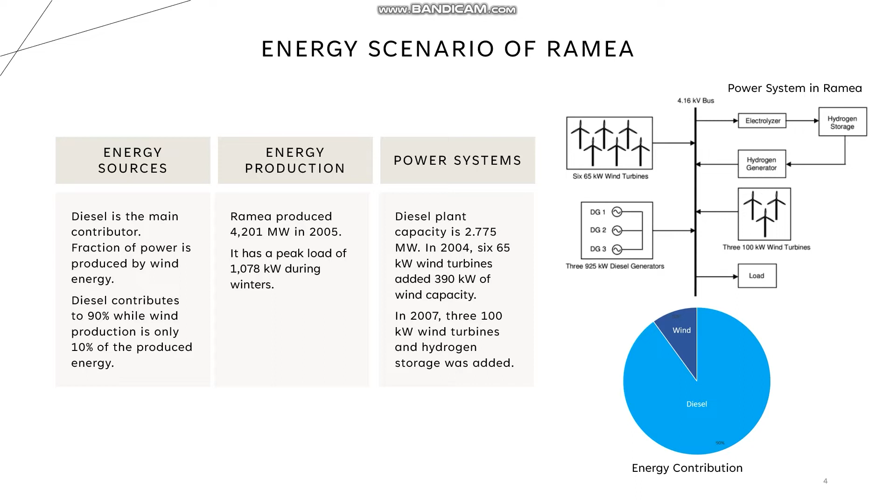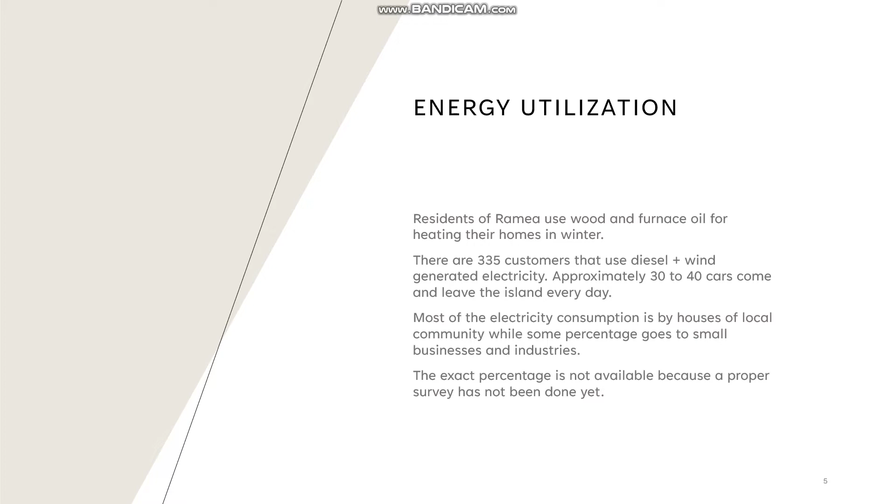Most of the electricity consumption is by houses, while some percentage goes to small businesses and industries. The exact percentage could not be found because a proper survey has not been done yet.

Looking at the greenhouse gas emissions and environmental impacts in Ramea, before the wind farm installation there was 100% diesel-based energy with a fuel consumption of 1 million liters per year and an average of 3,300 tons of greenhouse gas emissions.

When the wind plus diesel hybrid power system was introduced, it displaced about 425,000 kilowatt-hours of diesel energy and saved about 120,000 liters of diesel. The GHG reduction was as follows: 320 tons per year of carbon dioxide, 6.8 tons per year of nitrogen oxide, and 0.43 tons per year of sulfur dioxide, seen as overall GHG reduction.

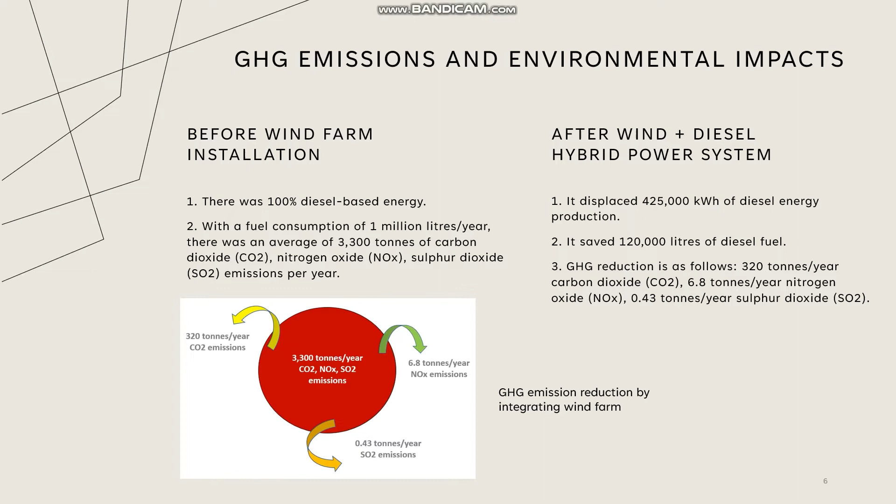It is also shown in the figure below.

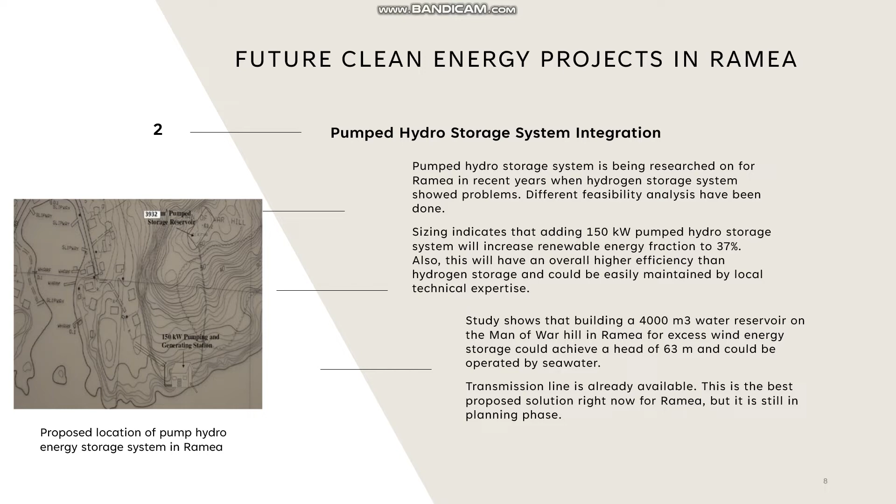The study shows that building a 4,000 meter cube water reservoir on Man of War Hill for excess wind energy storage could achieve a head of 63 meters and could be operated by seawater. And because the transmission line is already available, this is probably the best solution right now for Ramea, but it is still in planning phase.

Hi, my name is Nafis Ali and I'm gonna present the Iqaluit, an off-grid community of Nunavut.

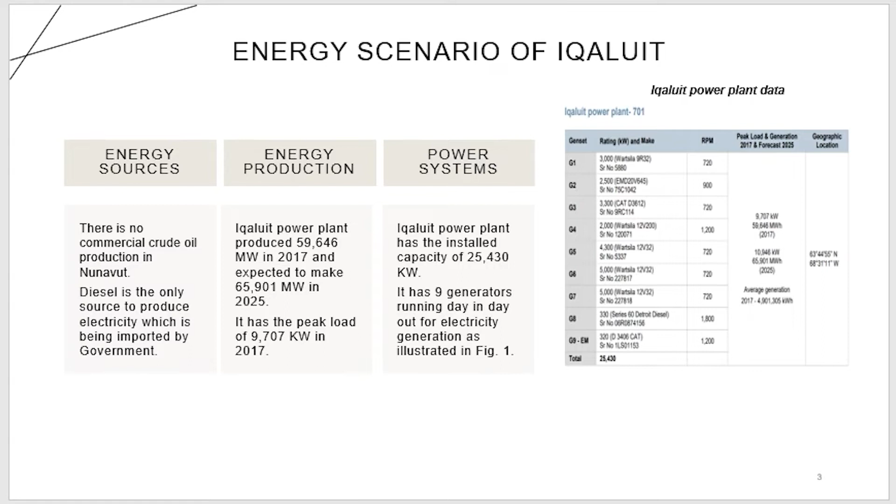First of all, I will shed light on the energy scenario of Iqaluit. There is no commercial crude oil production in Nunavut. Diesel is the only source to produce electricity, which is being imported by the government. Iqaluit power plant produced around 60,000 megawatt in 2017 with an average peak load of 9,700 kilowatts, and it has the installed capacity of 25,430 kilowatts. Nunavut has some of Canada's highest electricity rates.

Nearly 80% of all energy costs in Nunavut are covered by the government of Nunavut to keep the cost of electricity reasonable. When it comes to energy consumption, 79% of the total energy is used by stationary energy sectors, which are industries, residential and commercial buildings, and the rest is used by the transportation sector and waste.

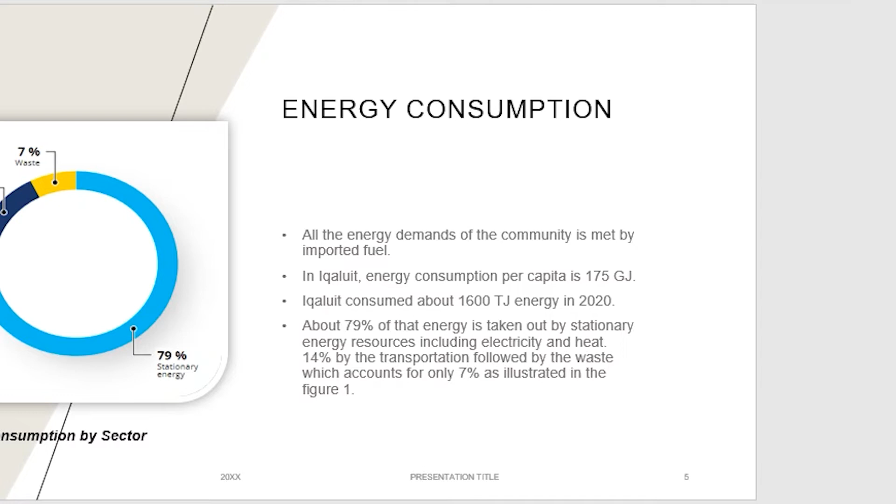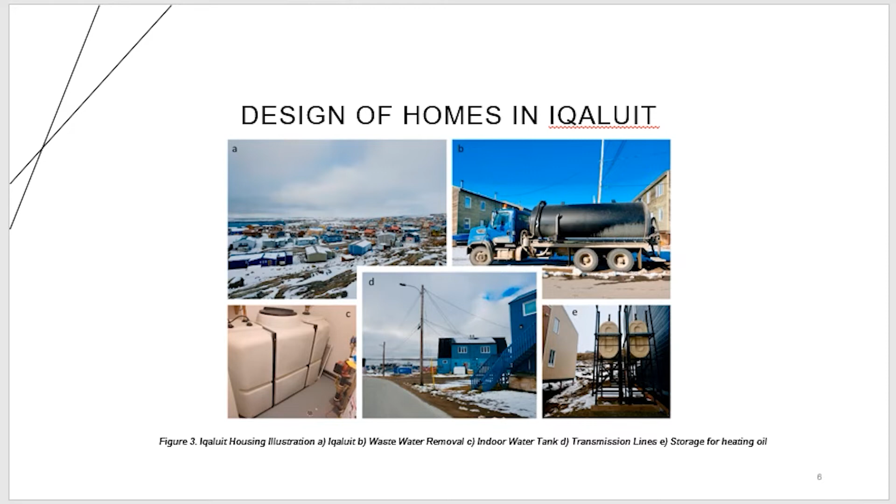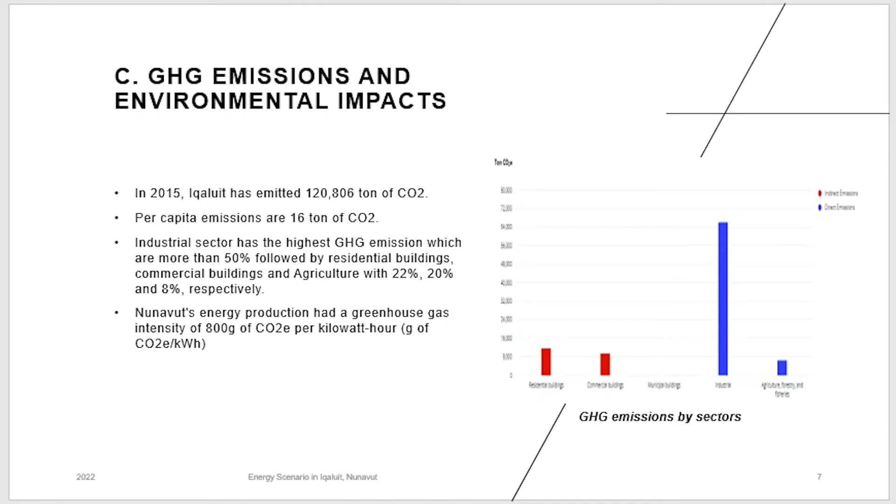When it comes to GHG emissions, the industrial sector has the highest GHG emissions, followed by residential and commercial buildings and agricultural sectors. Nunavut's energy production had a greenhouse gas intensity of 800 grams of CO2 emissions per kilowatt hour.

As you know, the whole city is electrified by diesel powered generators, which are the major source of GHG emissions. Diesel kept in storage tanks throughout the year often contaminates the water through spillage. It also emits toxic pollutants like particulate matter, volatile organic compounds, and nitrous oxide, which worsen respiratory problems and can contribute to smog.

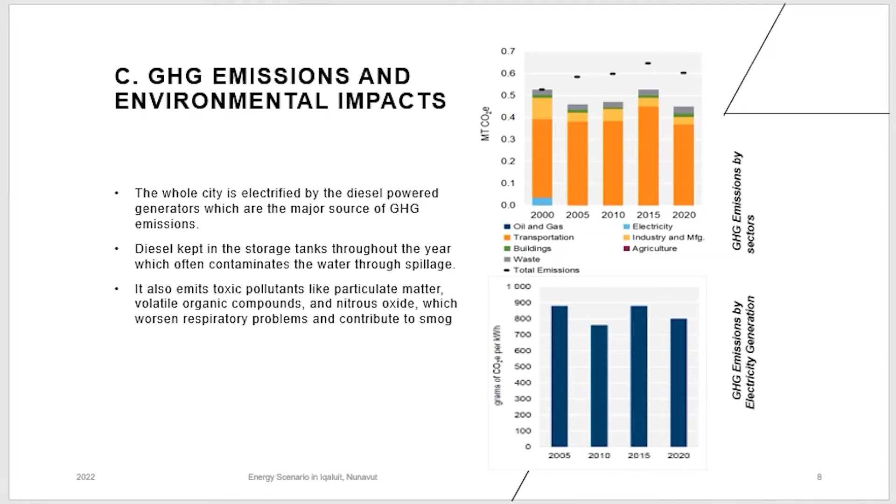These are the potential renewable energy resources available in Iqaluit, and due to insufficient funding, they have done nothing to harness these resources yet.

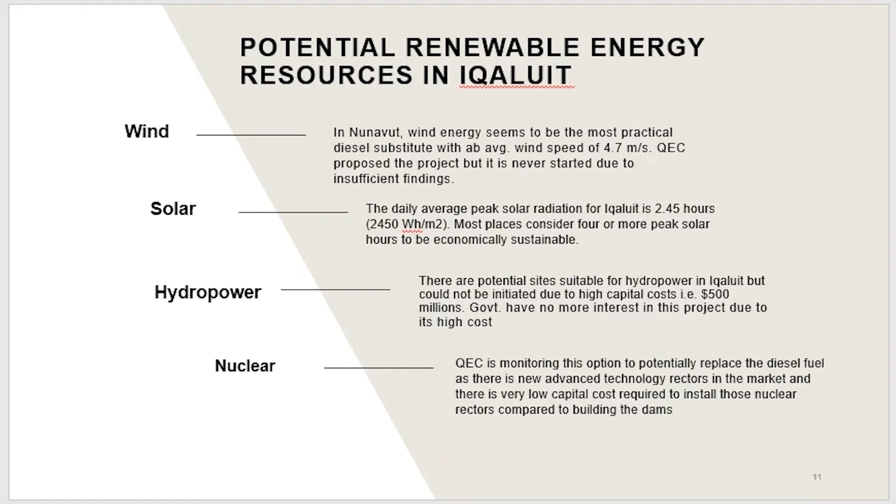The most important one is tidal energy, because this is possibly the finest renewable energy substitute for diesel in this region. Iqaluit has some of the highest tides in Canada, and it has the potential of producing 30,000 megawatt from 34 different locations.

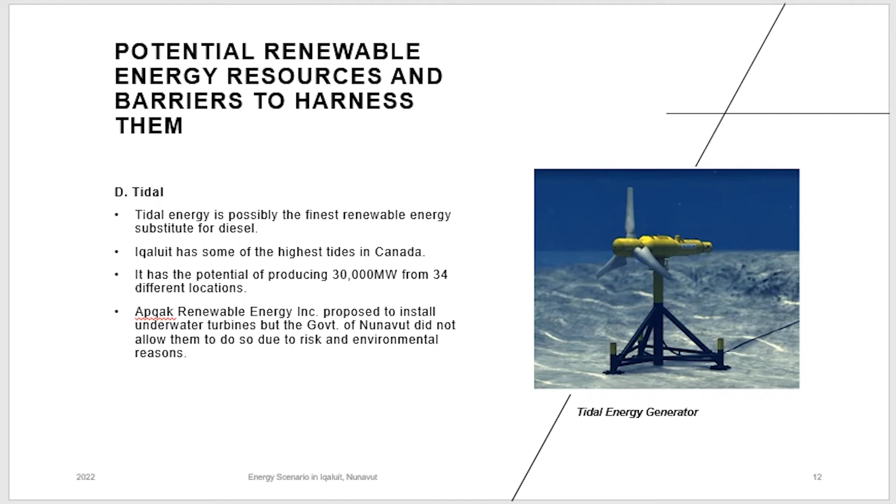Apqak Renewable Energy Company proposed to install underwater turbines, but the government of Nunavut did not allow them to do so due to risk and environmental reasons.

These are some other options which can be considered to cut down diesel consumption: energy efficiency retrofits and district heating systems. It can work by collecting the residual heat from industries and then delivering it to the households.

And solar energy generation with net metering. Customers are permitted by QEC to generate up to 10 megawatt from renewable energy resources and send any excess electricity to the local grid in exchange for credits applied to the monthly bills. There's another one, you can also capture the carbon by utilizing CCS technology.

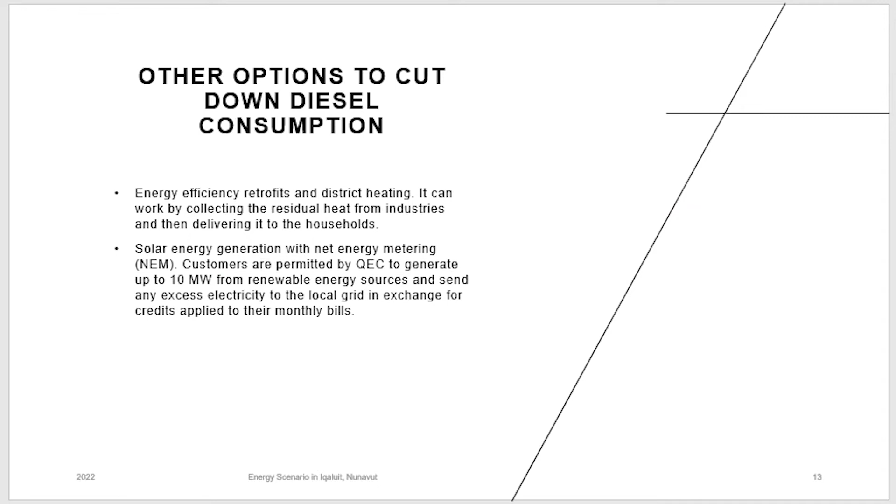Brochet is an off-grid community located in northern Manitoba and is also considered a northern community of Canada.

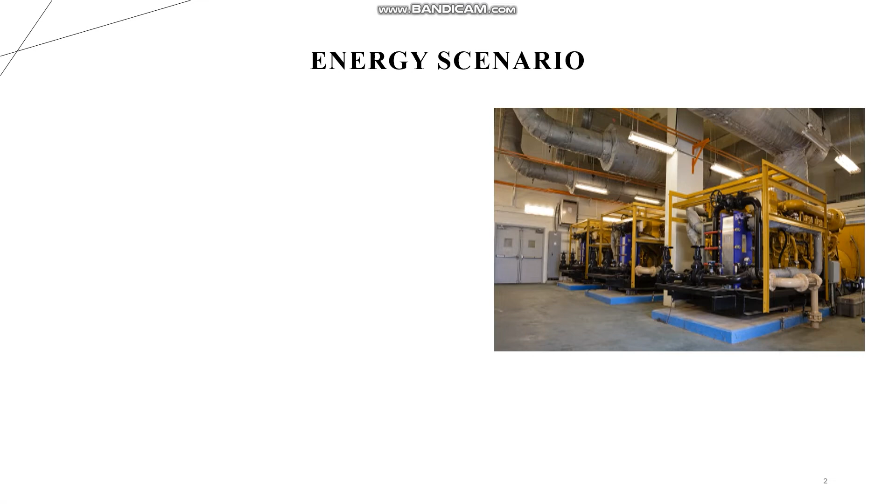First of all, I'd like to discuss the energy scenario. The Brochet power station consists of three diesel generators and has a capacity to generate 2.63 megawatts. People of Brochet also use oil furnaces for heating purposes. Some of the homes still use wood for heating and cooking.

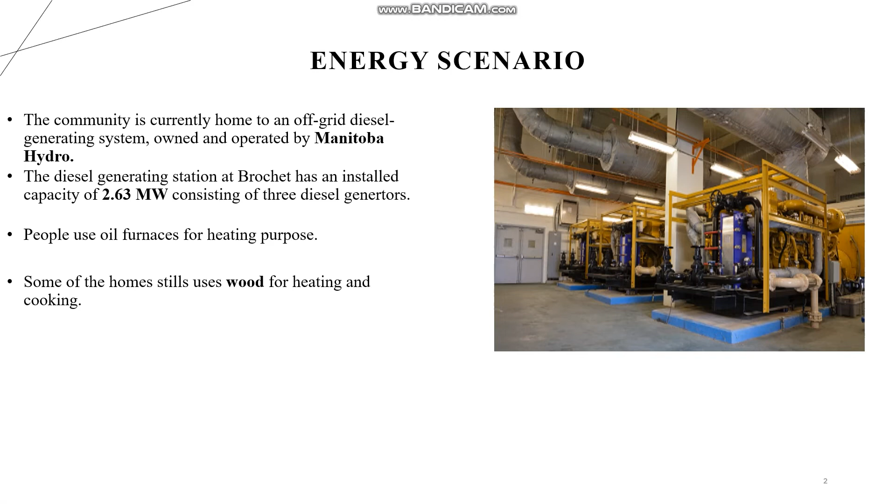Using oil to heat a home directly with a liquid fuel furnace is approximately 1.9 to 2.8 times more efficient than using diesel to generate electricity, which is then used to heat the home with resistive heaters.

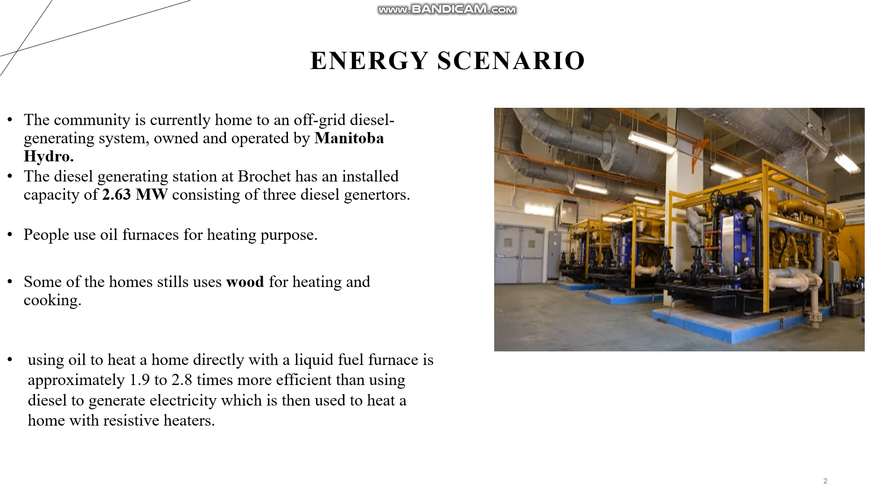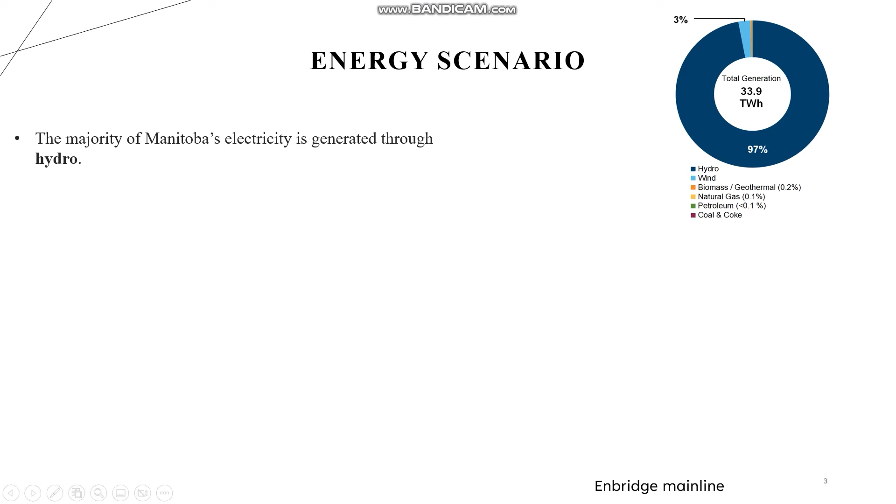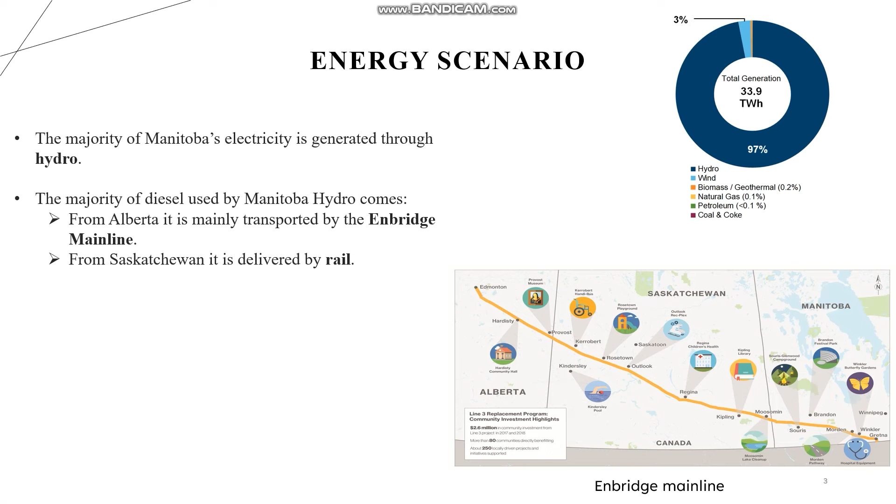As we know, Manitoba generates most of its electricity through hydro, almost 97%, as shown in the figure. So the majority of diesel used by Manitoba Hydro comes from Alberta, transported via the Enbridge Mainline, or from Saskatchewan through rail. Here's a diagram showing the Enbridge Mainline, which starts from Edmonton and passes through the main cities of Saskatchewan and Manitoba.

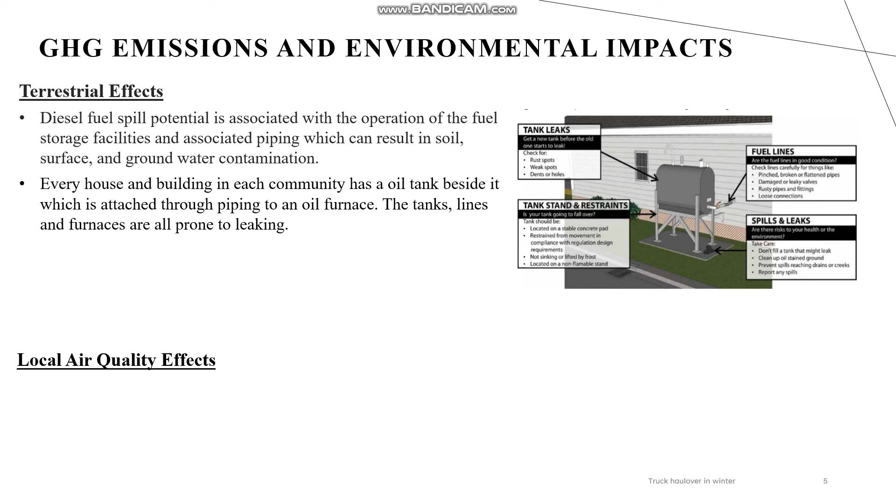Now the environmental effects. First, the terrestrial effect: diesel spill potential is always there with storage facilities and associated piping, which can result in surface and groundwater contamination. Each and every house and commercial building has an oil tank connected to an oil furnace. These tank lines and furnaces are all prone to leaking. The diagram shows the potential points where leakage can occur.

The other effect is the aquatic effect, which poses a greater risk to aquatic life. As we can see in the picture, there is a diesel truck traveling over the ice in winter due to bad ice conditions, which is very dangerous for fish, a source of food for the people in Brochet.

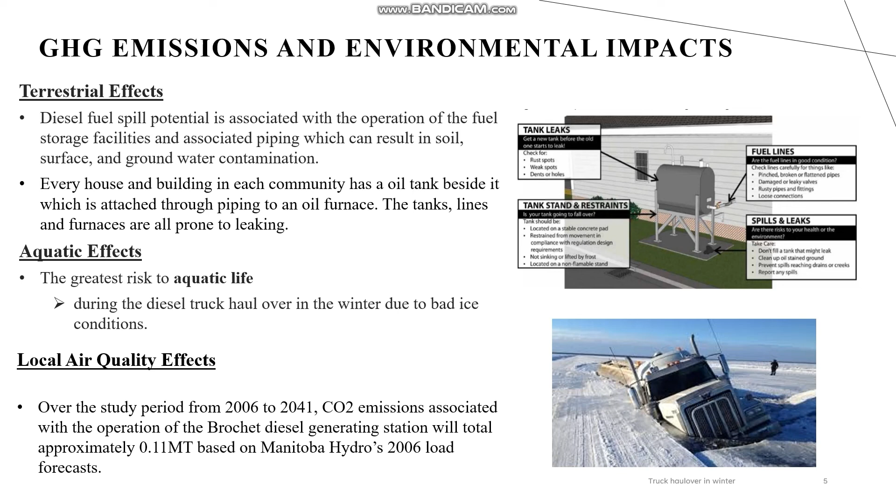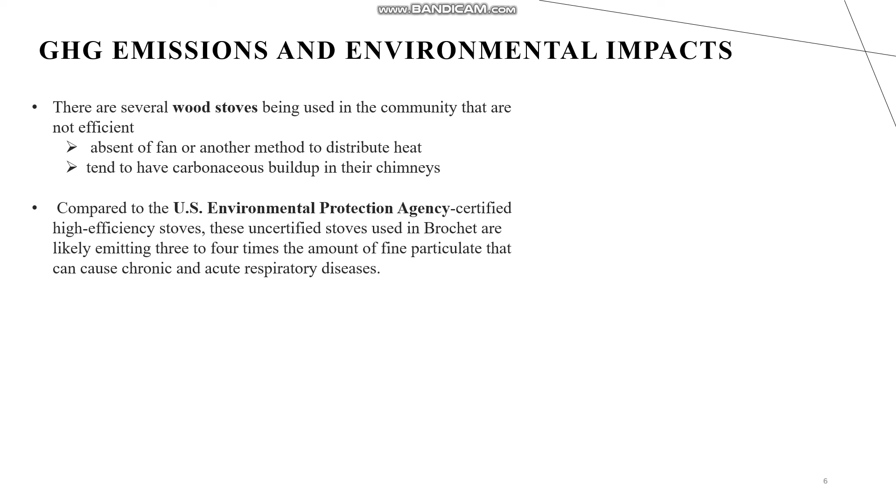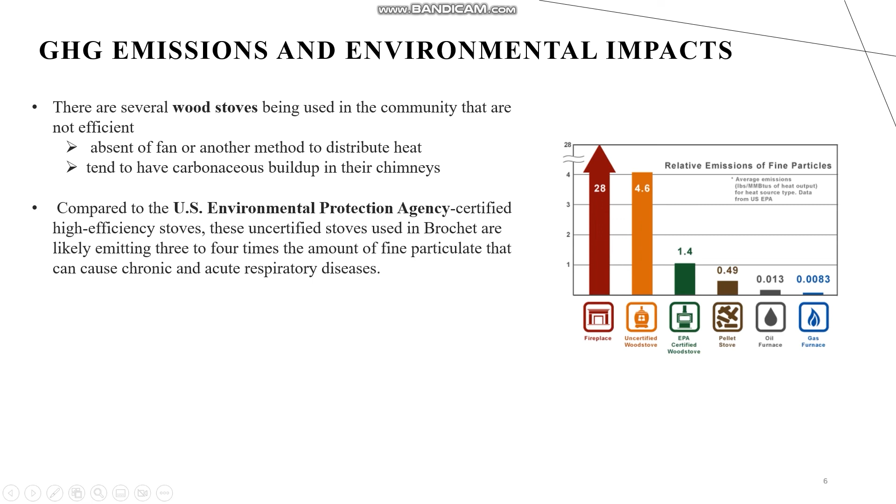There are many clean energy projects in Brochet, which are being discussed between Manitoba Hydro, the provincial government of Manitoba, and the federal government.

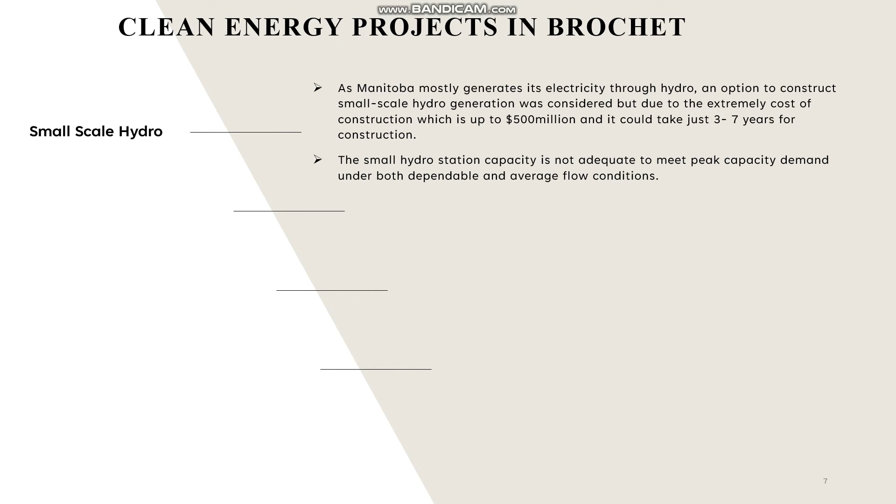The first was smaller scale hydro, since Manitoba generates almost all of its electricity by hydro, so it was considered, but the high cost and long construction time were the main obstacles. Also, the flow conditions near Brochet are not good enough to meet the capacity needs of the community.

Second was natural gas, but due to logistical challenges and the high cost of connecting to the existing Centra Gas network, it was also ignored.

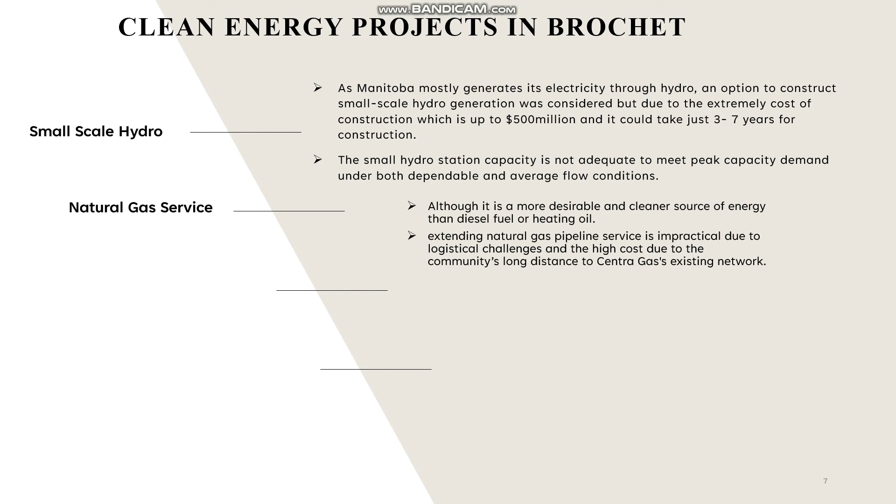Third was augmented diesel generation with wind power, which is in the development phase and being discussed, with Manitoba Hydro discussing with the provincial government to install the system. This option will decrease emissions, but it will not eliminate the use of diesel generation, because wind generation cannot meet the demand of the community and must be used in combination with diesel generators.

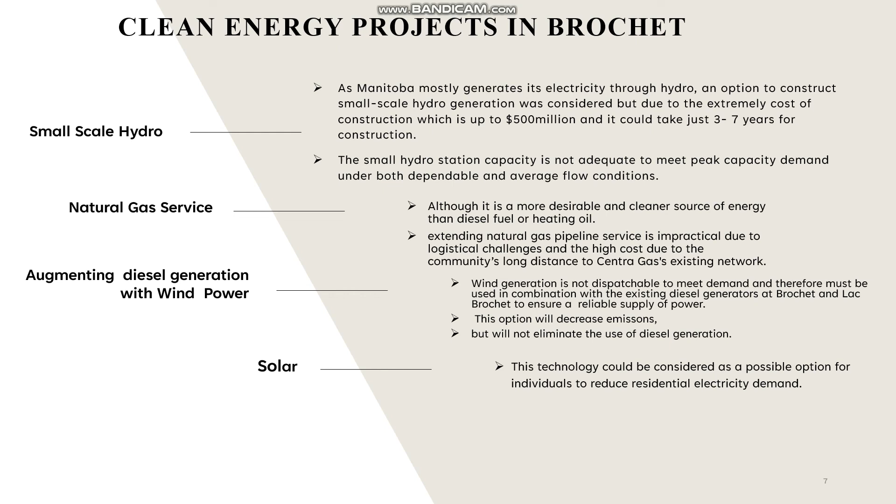Fourth was solar, which can be used on an individual basis to reduce residential electricity demand. Another option was connecting with the Saskatchewan grid, located at Wollaston Lake, and another was connecting with the Manitoba grid. As we can see, connecting with the Manitoba grid is difficult because of the large distance.

In conclusion, every off-grid area that we discussed is dependent on diesel-powered electricity, but renewable energy projects currently planned or under construction will help decrease diesel dependence. It will also provide benchmarks for off-grid systems and reduce GHG emissions and environmental impacts.